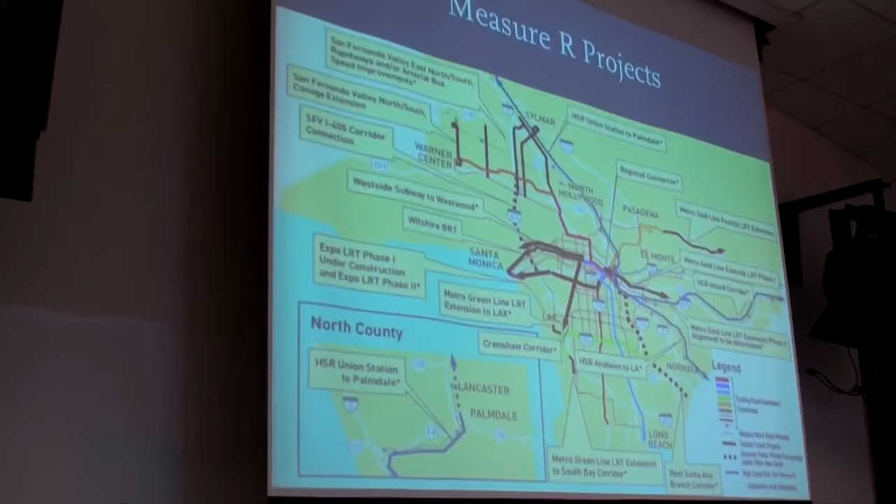Okay, so I had directions on this. Right, okay, I always like to show this picture. Those of us in this room, some of us have actually worked on these projects, this shows what we've accomplished in the last 25, 27 years. I came here a younger man in January '85, and none of that existed.

Okay, so we can really congratulate ourselves for what we've accomplished. Now, through Measure R, of course, we're going to build a lot more. I've worked with people in this room over the years on these projects, both as a Metro employee during my second tenure with Metro, and also as a consultant. Again, this is what we've accomplished, and you can see where we're going.

I knew I should have had directions on this. Okay, this is the Crenshaw Project, that's the yellow line. Now, you can see it provides a good backbone. It does connect with the Expo line, which is the brown line, and goes all the way to the green line. Now, one thing you can see about this project is you kind of want to extend it. We're making a major investment in this Crenshaw corridor, and we want to extend it.

Now, there's already a Measure R project called the South Bay Green Line Extension that could go hopefully as far as Florence. Now, we all know there's a referendum coming up in the fall, in November. Are we going to vote for it, yes? Yes, good. Well, if that passes, guess what? We have another Measure R project that's going to come forward. That's a good thing, because that means more work for all of us. And one thing we need in LA County, of course, is what? Thank you.

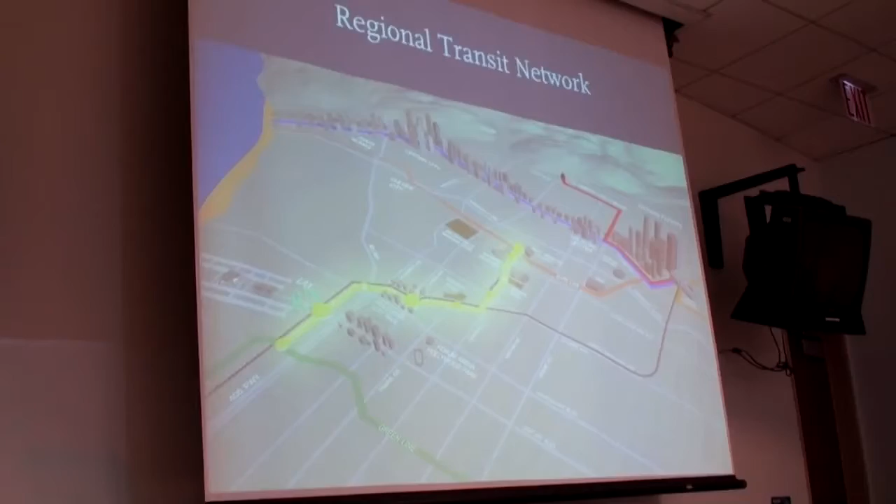So eventually this line, not only going south, but you can see it also wants to go north. It wants to connect with the purple line, and eventually go all the way—I call it the son of Measure R—all the way up to Hollywood. This line, once we extend it, it won't be me doing it, but it'll be someone else doing it, will actually rival the ridership we have on the blue line. Anybody know what the ridership on the blue line is today? Just a guess.

What was that? 30,000. Blue line? 80. How about in the mid-80s? 85,000. Okay, I tell you, when that line opened in 1990, nobody envisioned we're going to see that kind of ridership. So we've proven a point: we can actually get out of our cars and ride transit. I think that's great news.

Especially for people like me that work in this business, and others, of course, that want to help us build it.

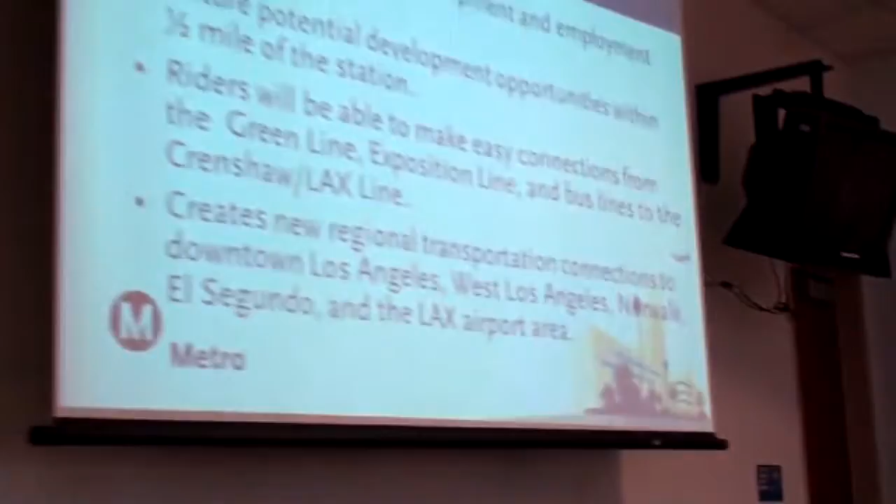Again, what are the benefits of this project? Well, it does provide economic development and employment opportunities. Again, Measure R, when it passed, our commitment is great jobs. That's exactly what we want to do.

It also provides future development opportunities, very dear to Dan here. Dan is a developer in his past life, and we want to see transit-oriented development. We have some good examples in our network today. They don't occur overnight, they take work. But all these projects, including this one, have good potential for development.

Okay, easy connections from the Green Line, Expo Line, and bus lines. It creates new regional transportation connections to downtown Los Angeles, West Los Angeles, and so forth. So again, we're connecting the county to what we've never done before.

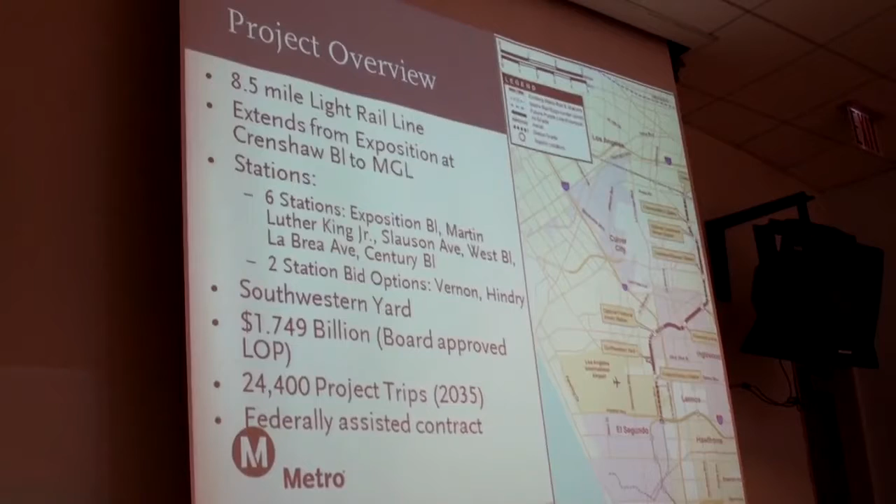Okay, this is the project at a glance. It is a light rail project, 8.5 miles. As I say, it does extend from Expo to the Metro Green Line. We have 6 stations in the base project. We have 2 optional stations, I'll talk about them more as I go on. So 6 baseline stations: Expo, MLK, Slauson, West, La Brea, Century, and of course the optional stations of Vernon and Hindry.

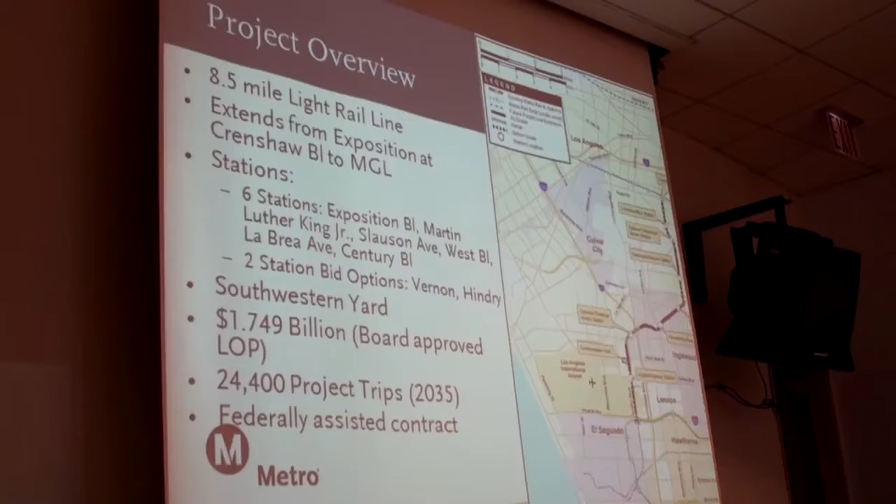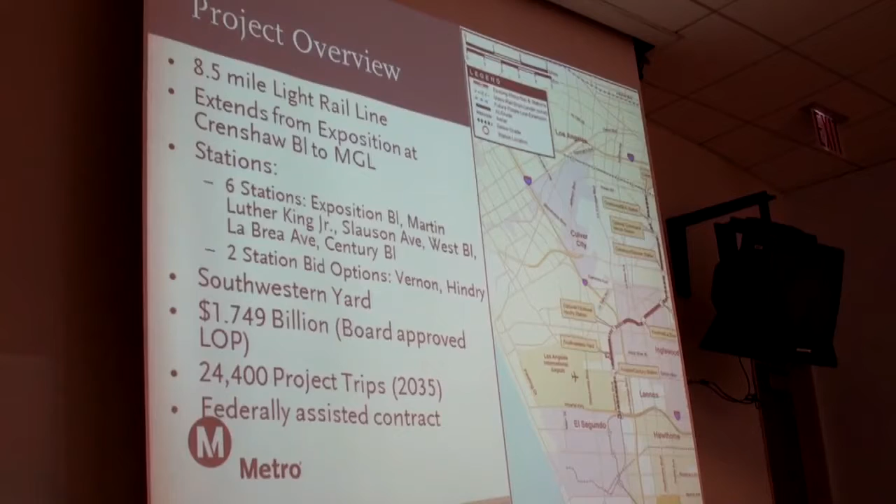We have a yard in this project. One thing we've done kind of unique to this project is rather than build one yard per line, we're now developing a yard here that won't only serve the Crenshaw line, but will serve other Measure R projects, like the South Bay for example. So we're actually now developing a yard that will serve multiple lines. These yards are very difficult, they're not easy, nobody wants them in their backyard. So it took us a while to get that yard to serve.

Again, we are a large project. We're a $1.749 billion project. Although the yard, we're actually sharing with other projects and the costs, so the true project costs are probably closer to 1.9. And I should just mention quickly, we are a federally assisted contract, so that means we have applied for a federal loan called TIFIA.

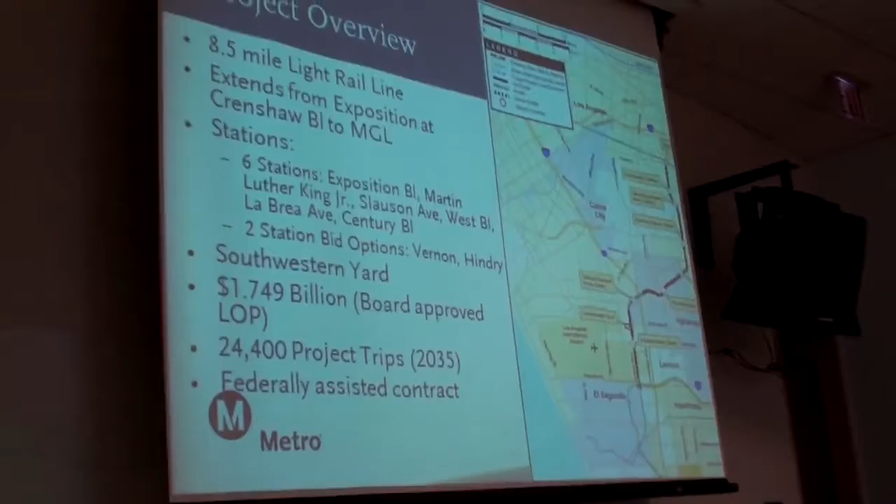Okay, I always like to show this. I've worked on a lot of light rail projects over the years. I've never worked on a project like this. This project is about 55% grade separation. Now that's astonishing, okay? And the reason it's like this is because we got good input from the community that made this a better project.

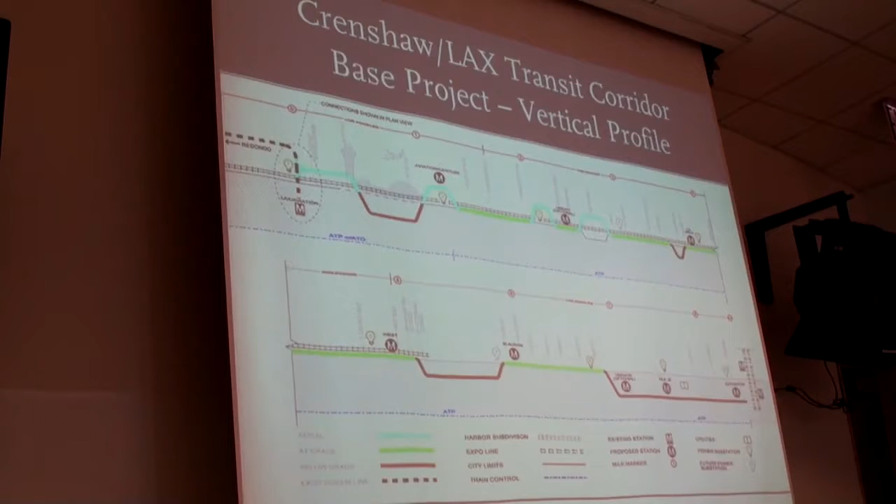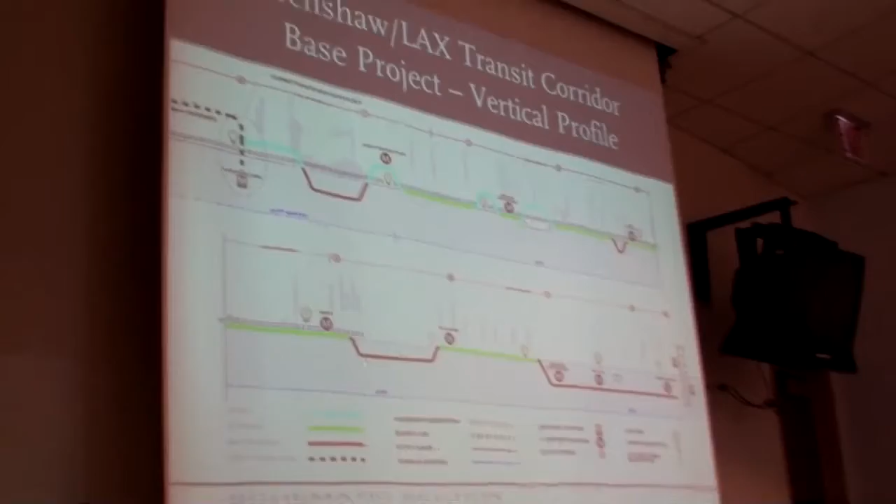This project has been in the planning for 3 decades, if not more. This project was not envisioned to be a light rail project, somebody wanted this to be a bus project. And I tell the community that we actually meet with on a fairly regular basis, because of you, because of your input, this has become a rail project, a better project today than it was intended.

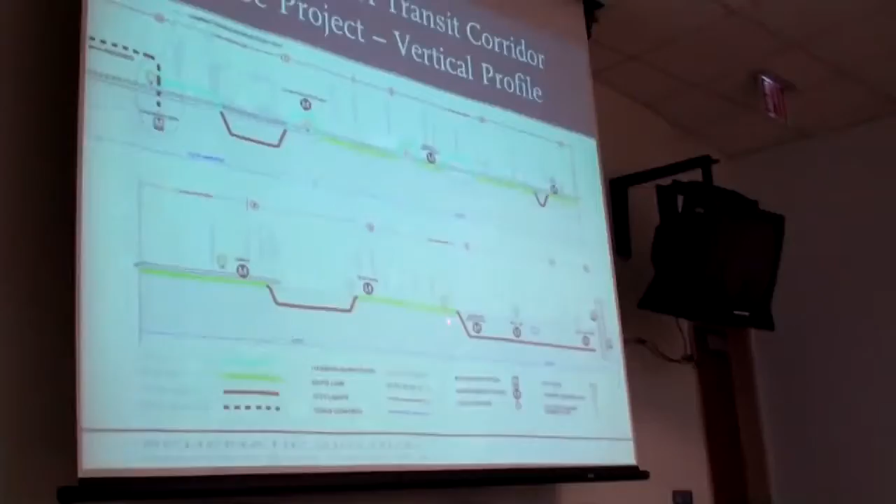So you can see, this is the Vernon station, the optional station that we are hoping to build. We also have the optional station in Westchester. But you can see here, we have a lot of grade separation. Now I'm going to go through some slides that kind of run you through the alignment.

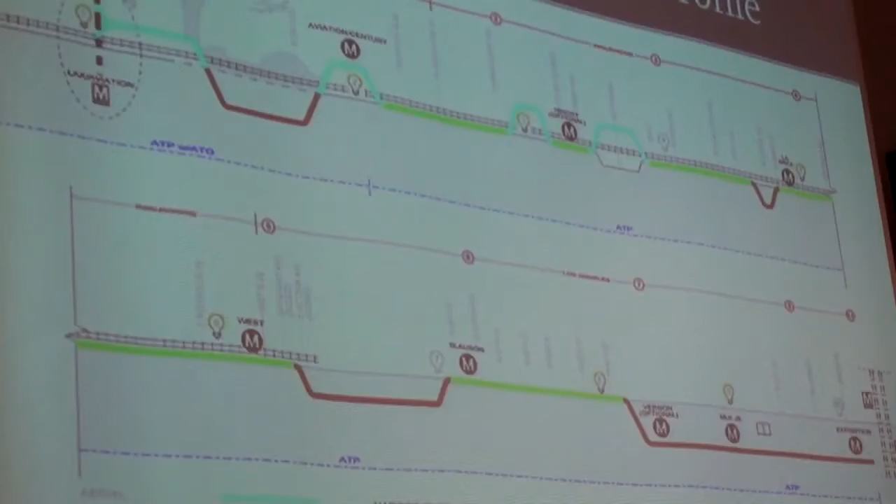Okay, so the project starts with connection to the Green Line.

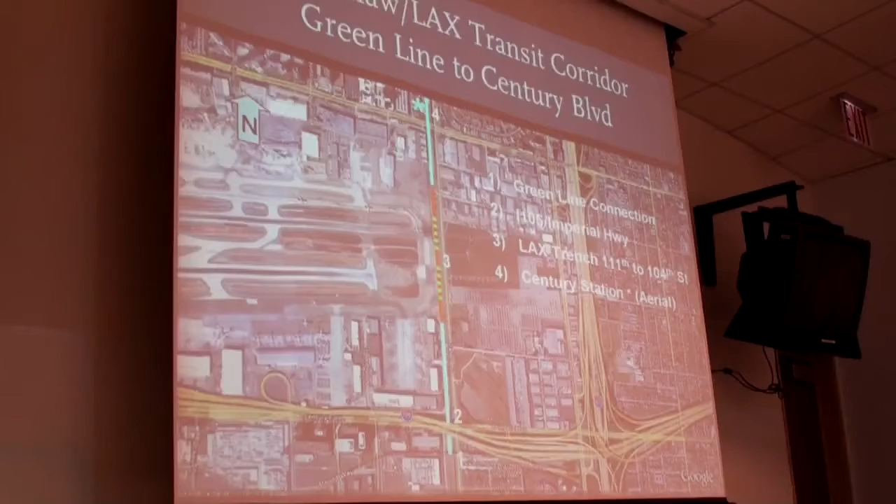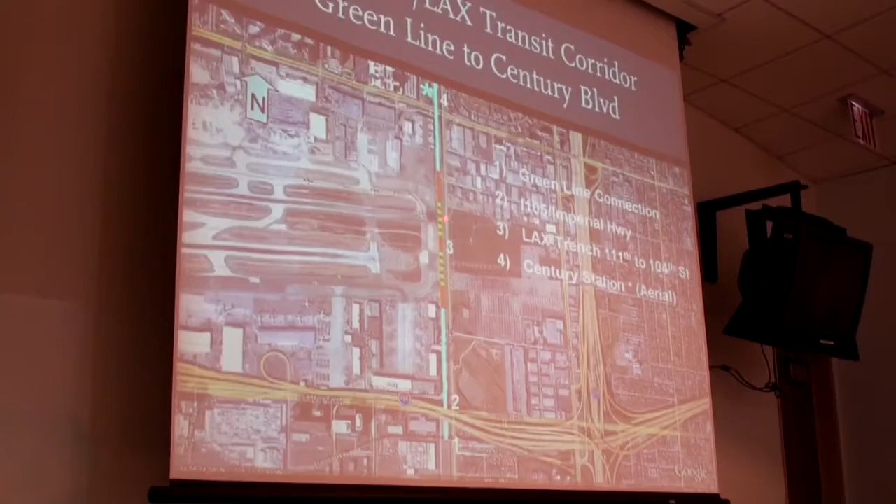The blue here is aerial. So we come off the Metro Green Line and fly over Imperial. We cross over 111, then come immediately down to grade. I'm sure you recognize the south runways here for LAX. We come down the grade and immediately go into a covered trench, we'll call it. Then we go right back up onto an aerial structure, crossing over Century, where we have the station at Century Boulevard.

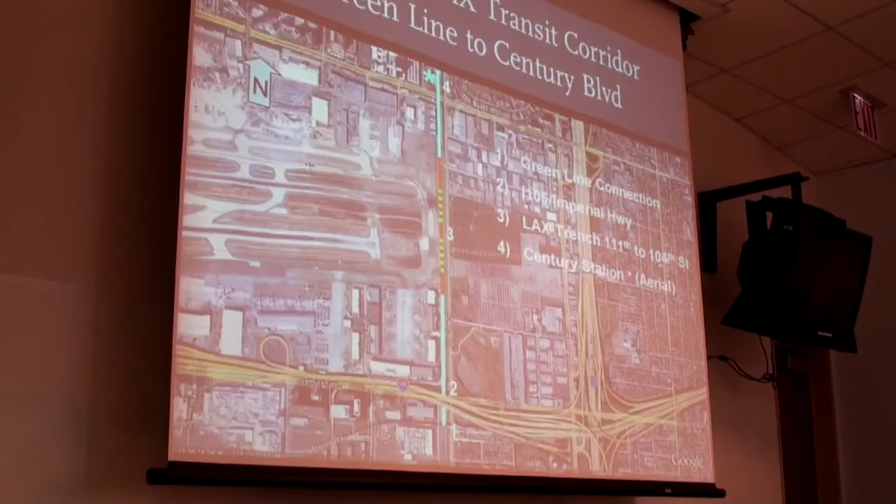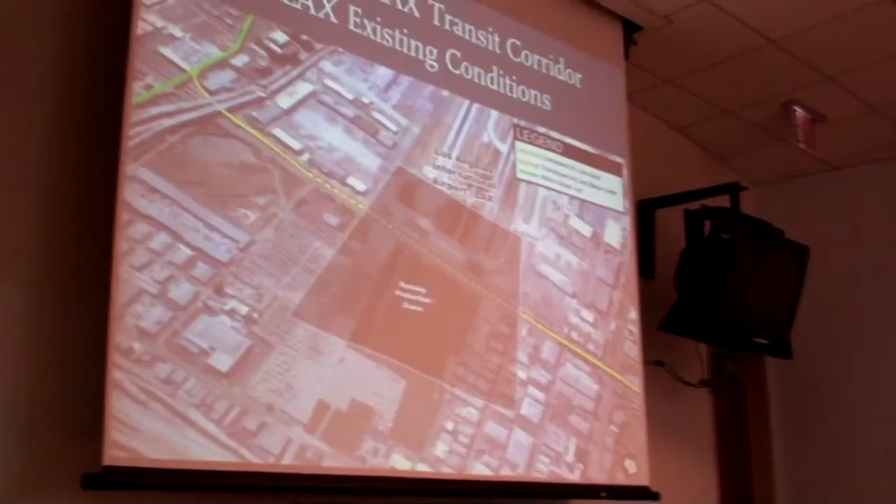This was a challenge, this area was a real challenge. Back in 1990, a project called the Metro Green Line was supposed to build this, supposed to build the Green Line all the way to Lot C, which would have gotten us pretty close to the airport.

We are seeking innovation from the teams moving forward. We'll talk more about this in our pre-proposal meeting, but we want innovation from the teams moving forward with us, and of course we want the prices. But FAA is quite difficult to deal with. We were able to at least get a covered trench, which saved us very much money. They wanted us to be in a fully covered tunnel, all the bells and whistles, so they couldn't go at grade. Dan was pushing me real hard, but this is probably the best we could get.

FAA, at the very end of the environmental phase, became what we call a cooperating agency. That means they have to sign off on the document before we can circulate it. FTA, the Federal Transit Administration, will not overrule the FAA, they simply defer to them. So we have to have two federal agencies, FTA and FAA, sign off on our document so we can circulate. We achieved that in a fairly short time. Supervisor Mark Ridley-Thomas was very helpful in that regard, opening doors for us with FAA in DC. I still have regular dialogue with the folks there, and continue to use them to work those issues out with FAA.

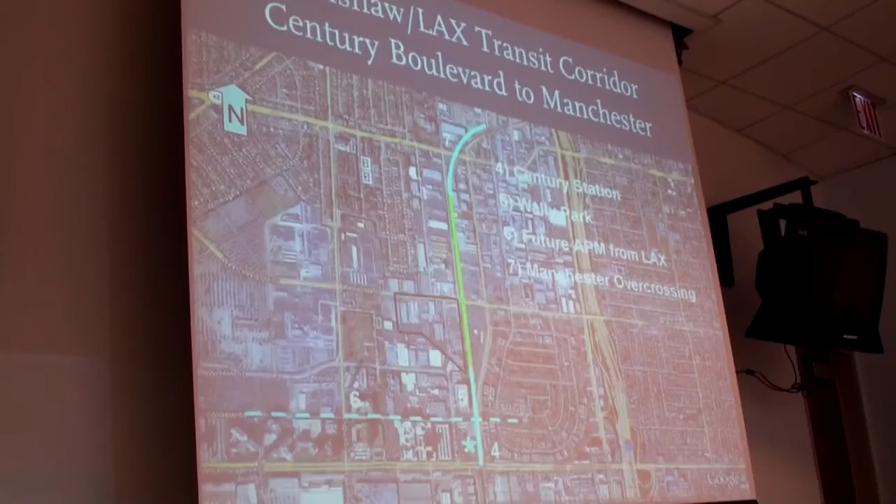Continuing, number 4 is the station. That little blue dashed line there is what I was calling the Airport Metro Connector. There are many different ways to do that, that's just one, it actually represents the future people mover. There's no guarantee it'll be a people mover, but this shows how that Century Aviation Station could someday become a major intermodal station, to reduce congestion around the airport and help commuters get there without their cars.

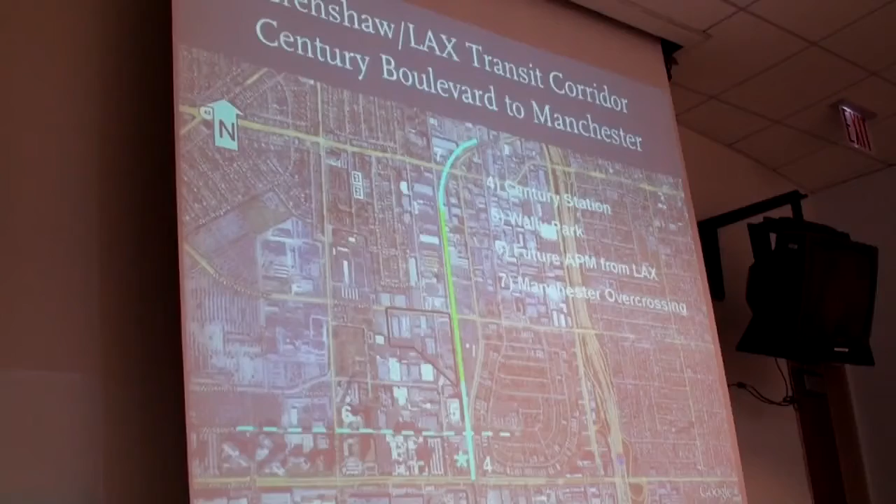So as we leave the Century Station, we do sneak by Wally Park, already having talked about the future people mover. Then we come back down to grade, which is the green. We immediately jump over Manchester, a major street. We cannot run at grade there, so we are grade separated over it.

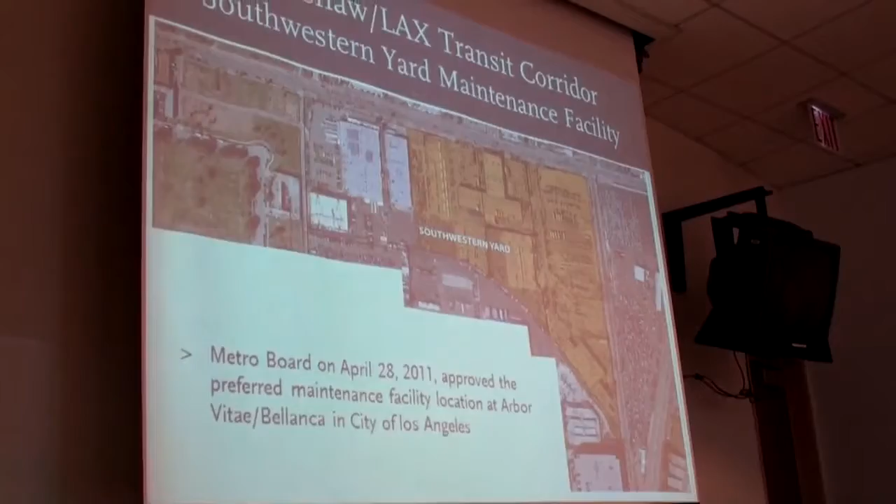This is our yard. If we go back a bit, you'll see where the yard is right here. We went through about 23 different sites before we went back to the board and finally selected this site. This is about an 18-acre site, it will hold about 70 cars, and it will serve not just this project but several projects in the Measure R pipeline. That's kind of what it looks like.

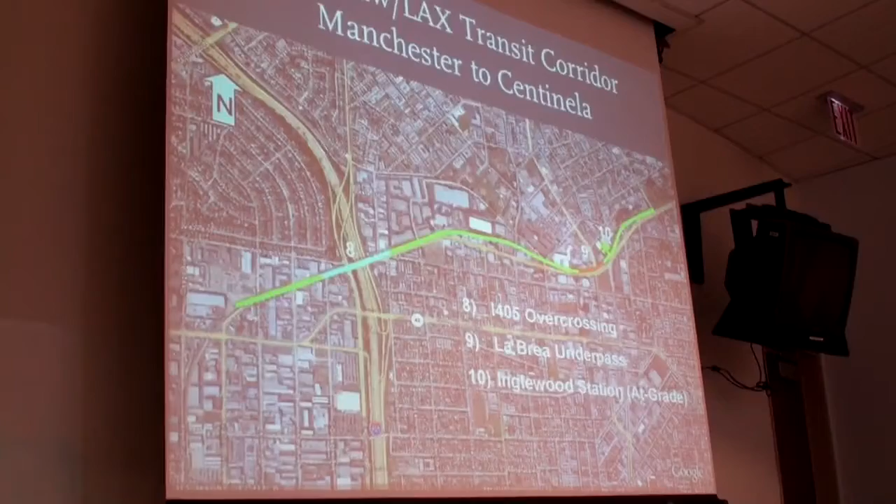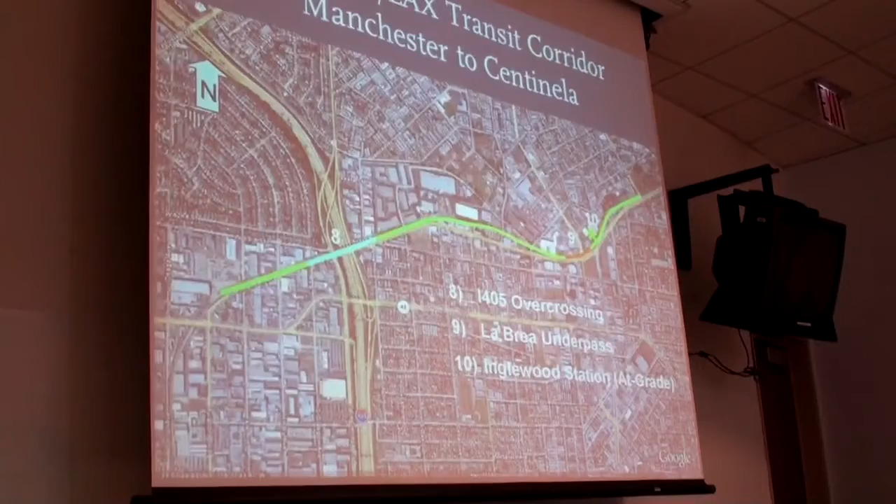So as we continue at grade, it's a very short distance. We then jump over La Cienega and the 405 freeway. La Cienega is actually part of an off-ramp off the 405 freeway, so we could not run at grade there. So we jump across the 405 freeway, go back at grade again, and we get to La Brea.

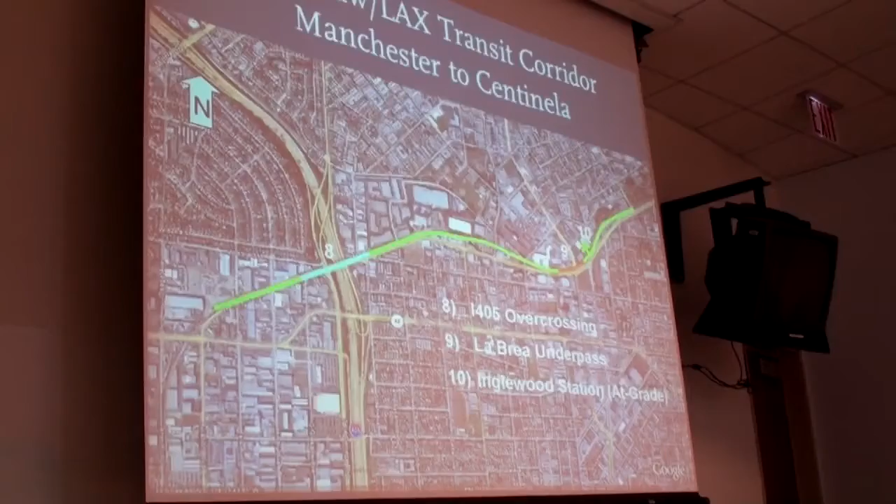We go under La Brea and have a station just on the east side. We originally wanted that station to be actually at La Brea, but there's an Inglewood fault there, and we did verify that the fault traces are active. So we had to move the station further away from La Brea. Now it fronts Inglewood's commercial district, right between Locust and Market.

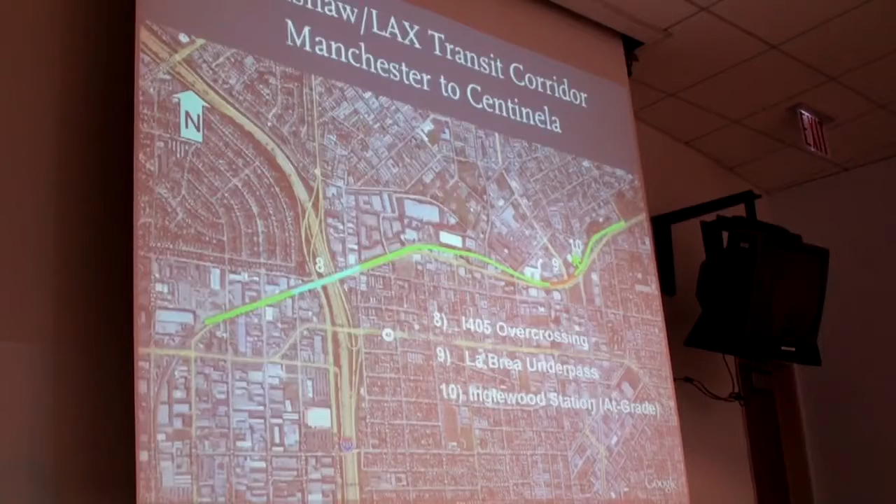Not an ATC, guys. Sorry, by the way, I'm using this word - for those who don't know, ATC stands for Alternative Technical Concept. We are looking for innovation from the teams to get a competitive edge, provide value, or so forth.

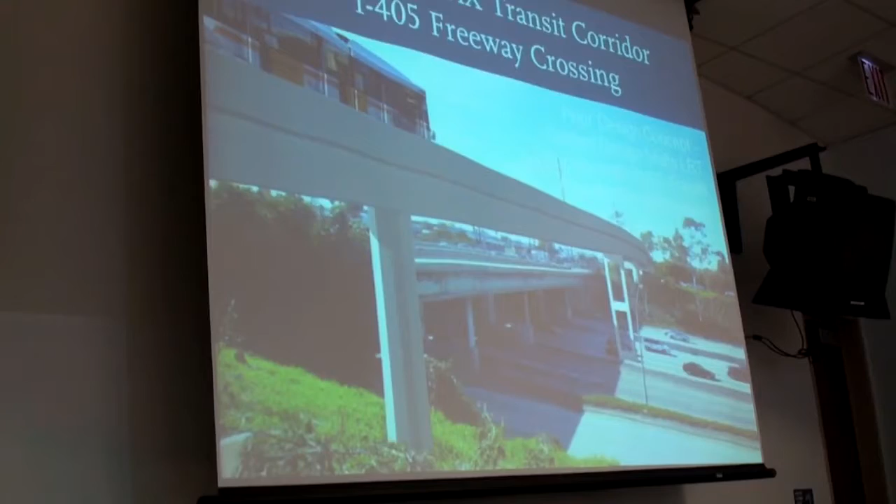But think of it this way - if you were to run across that bridge today with a freight train that runs every 2 hours maybe, compared to a light rail system that's going to run every few minutes, it's different. So if we want to go back up across La Cienega, remember the La Cienega ramp runs off the 405 freeway, it's very difficult to run at grade across La Cienega.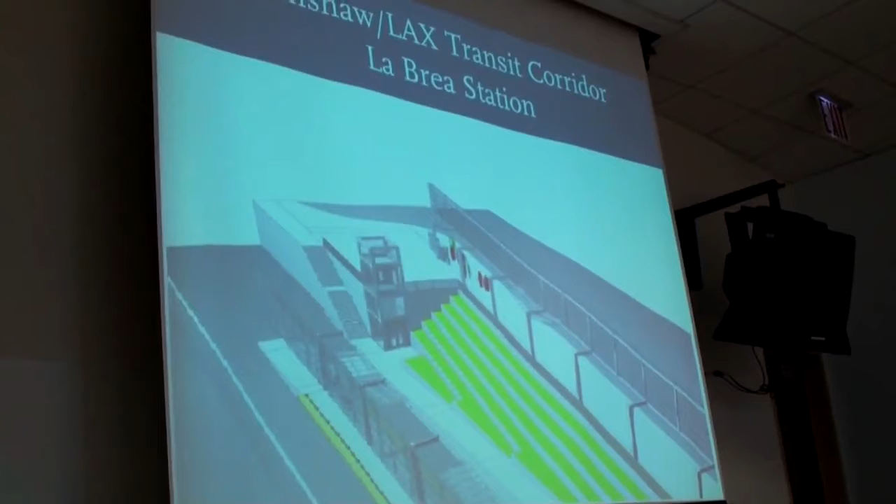Okay, this is the La Brea station. It's not the best picture I could find, Maris - in fact, I should have called you, you could have sent me a better one. But again, we did move the station further away from La Brea.

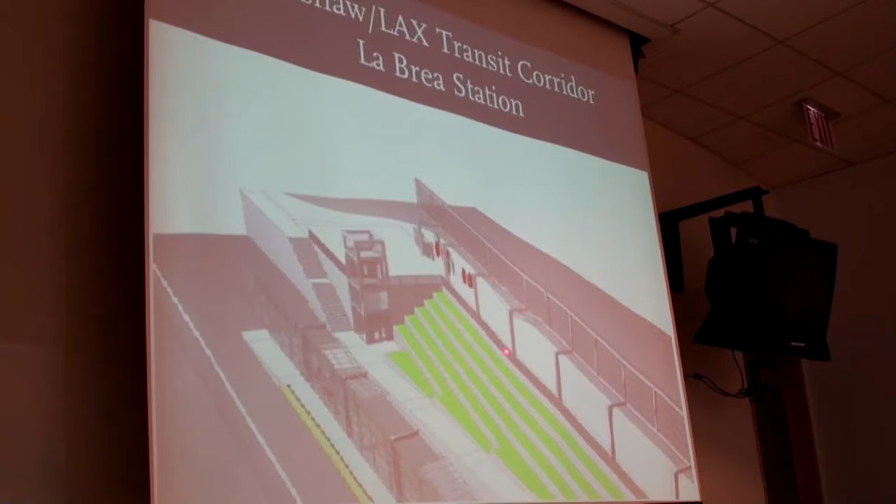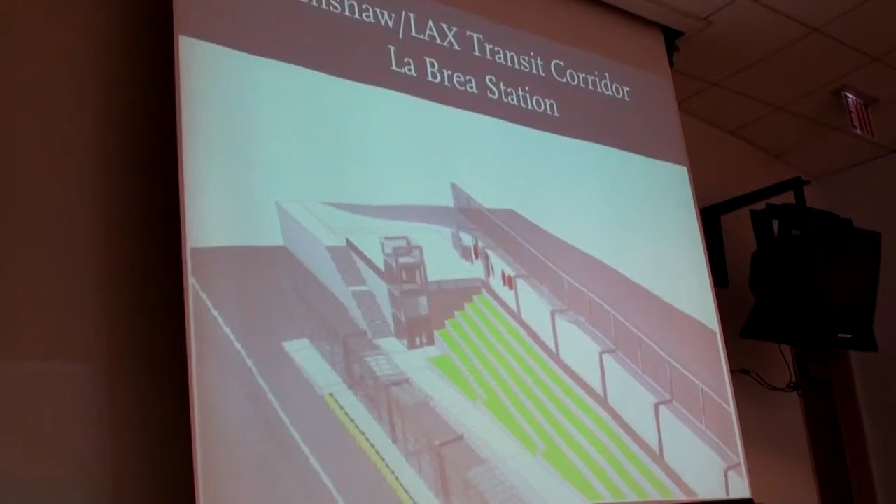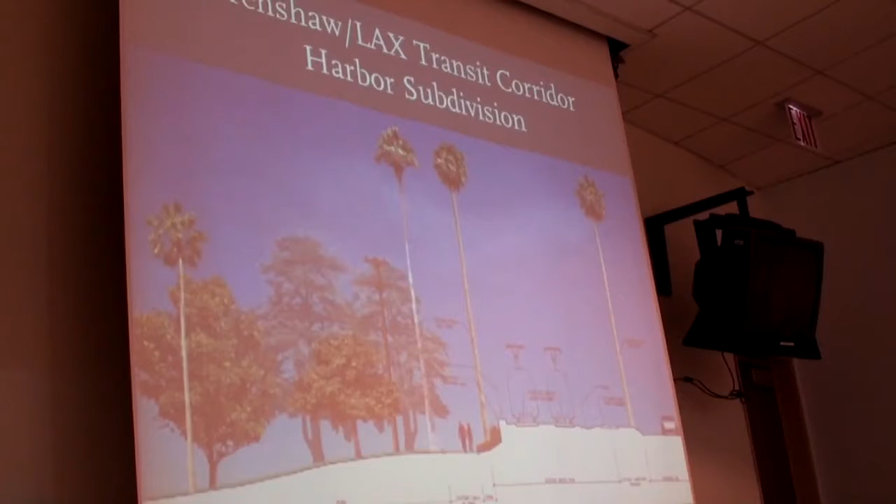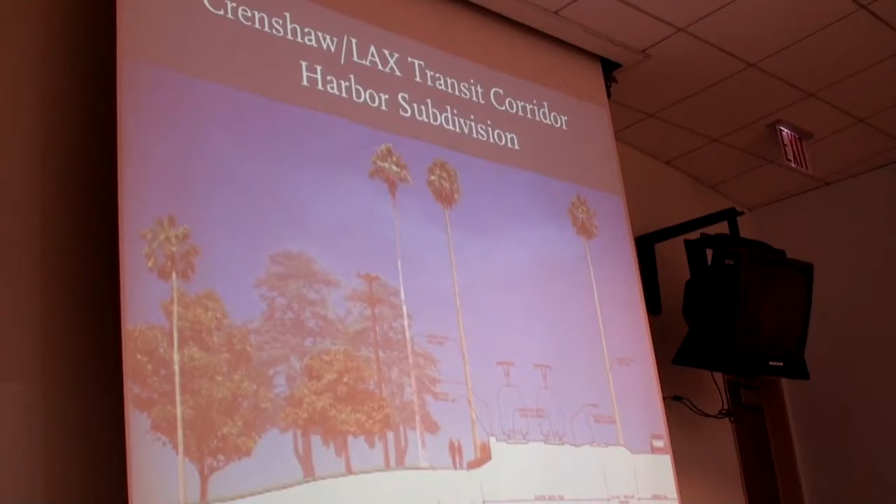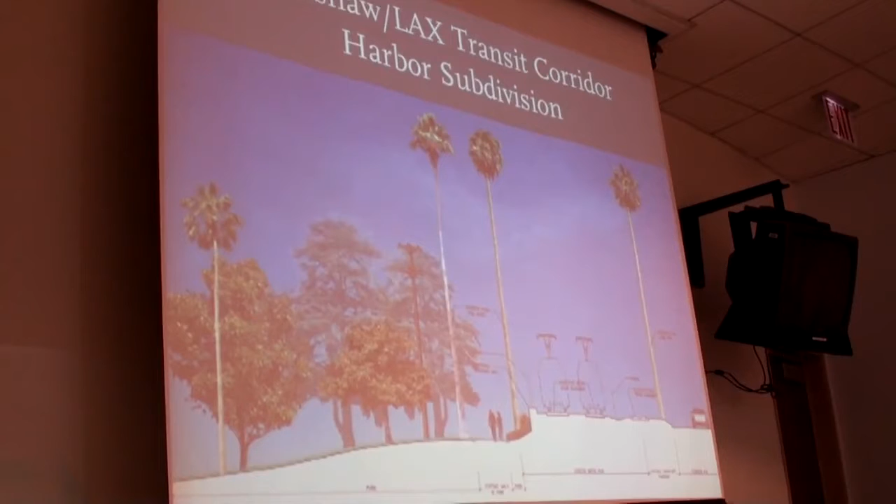Okay, this is the typical section along the Harbor subdivision. Actually, this is near Edward Vincent Park - there are a lot of palm trees. We used to have a cover sheet for this project with a lot of palm trees on it, but we changed the cover because we're in a new phase. We've committed to maintaining as many of the little palm trees as possible. That's a very typical section for us in the Harbor subdivision. Remember, the Harbor subdivision is based on an old railroad corridor, and for the most part we're running at grade through that corridor.

Okay, so we're continuing at grade. The next station is West Boulevard, the second station in the city of Inglewood. We are putting parking at several of these stations: La Brea, West, and Exposition. Now, that's kind of an interim use.

Again, I talked about development earlier in my presentation. If there's a better use for those sites, and I'm sure there will be someday, that parking could be very short-lived. Metro's not really big anymore in providing parking. We provide it where we have to. We're much more interested in good development proposals.

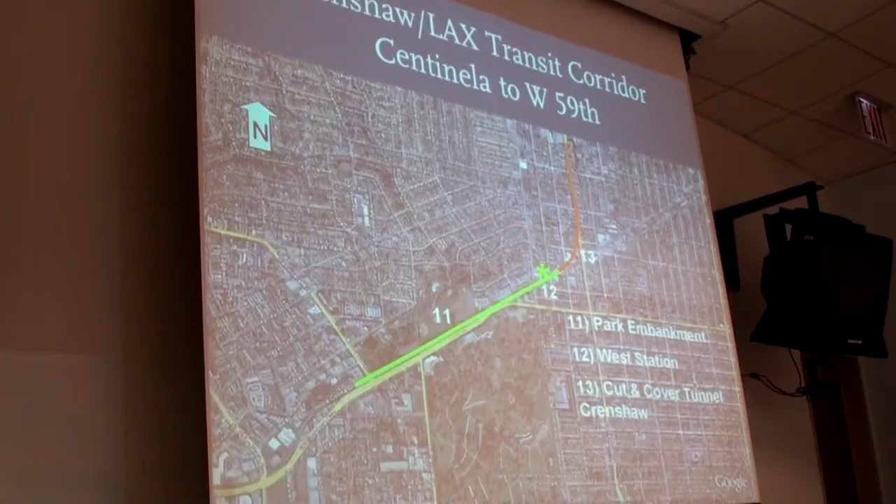If people are gonna ride the trains, don't they need places to park their cars?

We're encouraging you to be a commuter. I mean, this station at West could actually become like a neighborhood station. You can walk to it, you can drop off to it. There is some parking we're planning here in the interim period. Eventually, I think we'll find a better use for it. Again, Metro is trying to get you folks in this room to become commuters, to enjoy taking transit.

When you're running late, you want to run past some of the stations. But again, you get back on that freeway, you're gonna get late anyway.

You said that the station is in Inglewood. If it is west of West Boulevard, it is in LA. If it is east of West Boulevard, it is in Inglewood. Yeah, actually, West Boulevard itself is the boundary. The station itself is in Inglewood. Remember, West Boulevard is the boundary between Inglewood and LA, but this station actually is in the city of Inglewood.

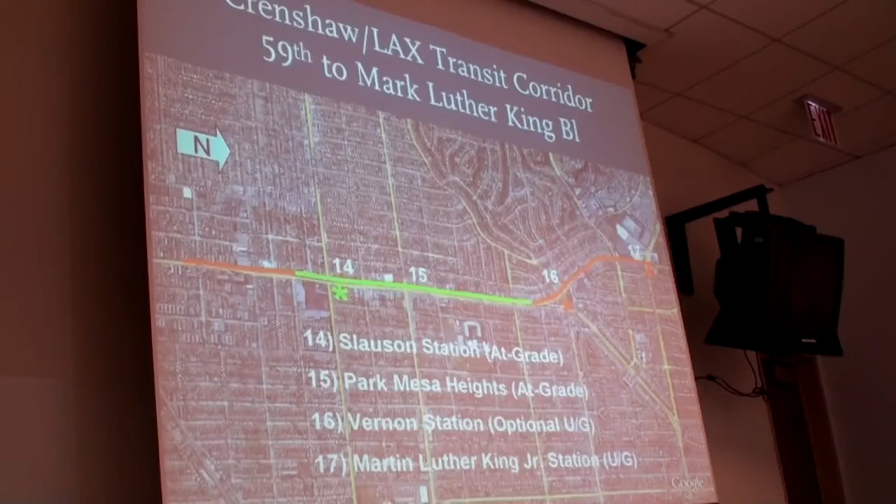Metro did get a lawsuit filed against Metro. We're going through the process, and we're just going to work through it. Slauson Station there - again, there is a station at Slauson in the at-grade section.

And you can see we're at grade between 48th and 59th Street on Crenshaw Boulevard. You can see again where the red is on 48th Street - we go back into a tunnel again.

In this case, we expect this to be a real tunnel, or some cut and cover at the end where the approach is. By real tunnel, I mean we're expecting you guys to propose a tunnel boring scheme.

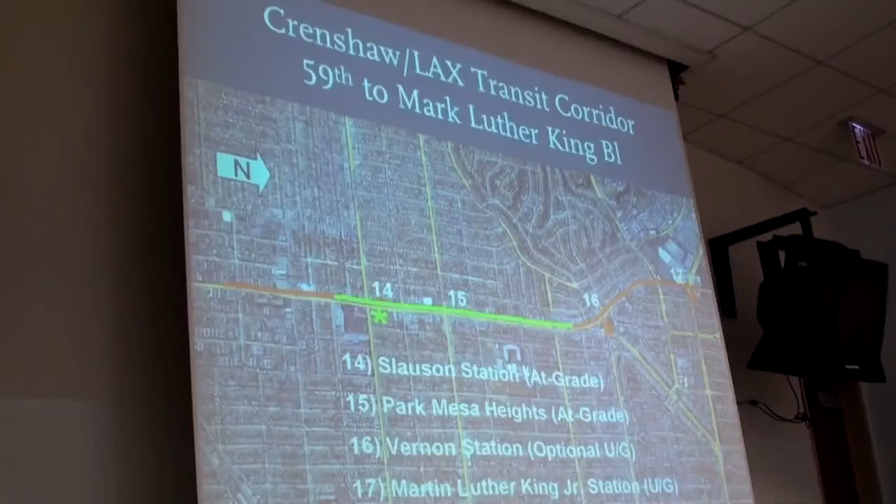Interesting to note, we cleared this project environmentally, fully cut and covered - you guys probably didn't know that. This project actually is similar to the East Side Project, only it's a bigger project. The East Side Project is one of Metro's most successful projects: on time, on budget, no claims, and saved a lot of money. So it's a project we are trying to model this one after.

How long is the tunnel, if I may ask? It's about a mile and a half. Again, it's very similar in length to the East Side Project.

Is the optional Vernon station on street or off street? I'm getting there, I'm getting there - that's why I put that to the end of the presentation.

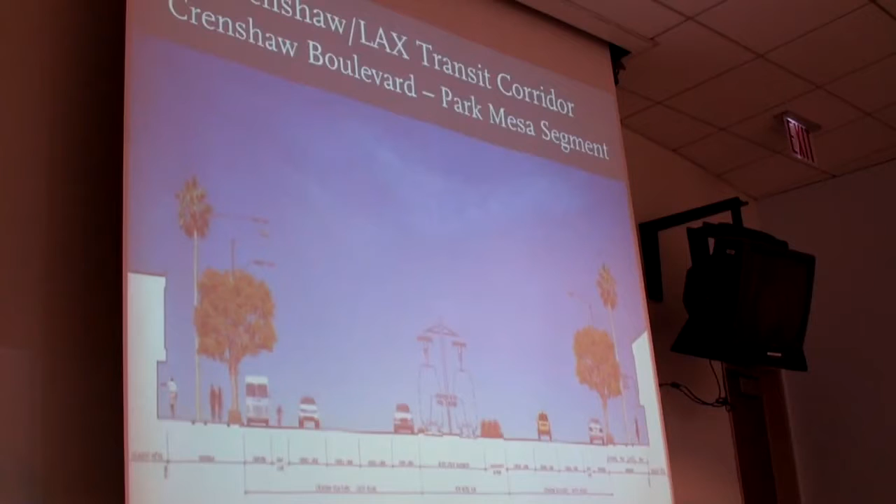This is the at-grade portion to Park Mesa. Now, this is the widest portion of Crenshaw Boulevard, so it lends itself to running at grade. There's a median in the center of that boulevard - we're taking the median out. There's also a frontage road on either side of this portion of Crenshaw Boulevard. Our concept here was to turn Crenshaw into like a wider Grand Boulevard, with wider sidewalks, landscaping, and so forth. But again, this is the widest portion of Crenshaw Boulevard. It does lend itself to being an at-grade light rail system.

Yeah, it's actually a little more than that. So again, it is a wide street - there's 3 lanes in each direction. When we're finished with it, again, it's a very wide street.

Did I hear you correctly that the frontage streets - today they are frontage road - will be taken out, and it'll be just a wide boulevard? What we're doing though is we're providing much wider sidewalks so that we have space, plus we're putting up landscaping.

Okay, this is just a snapshot of the Slauson Station. Again, we're in the center of a pretty wide street. Actually, a lot of traffic runs up and down the street.

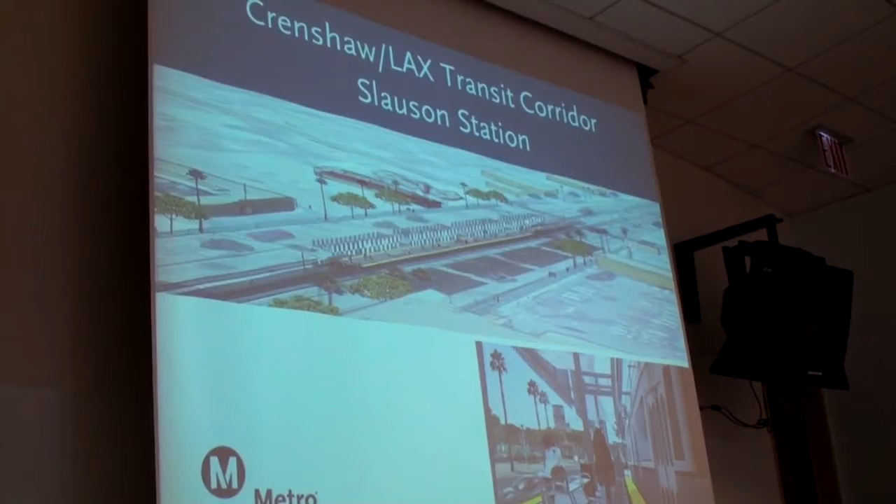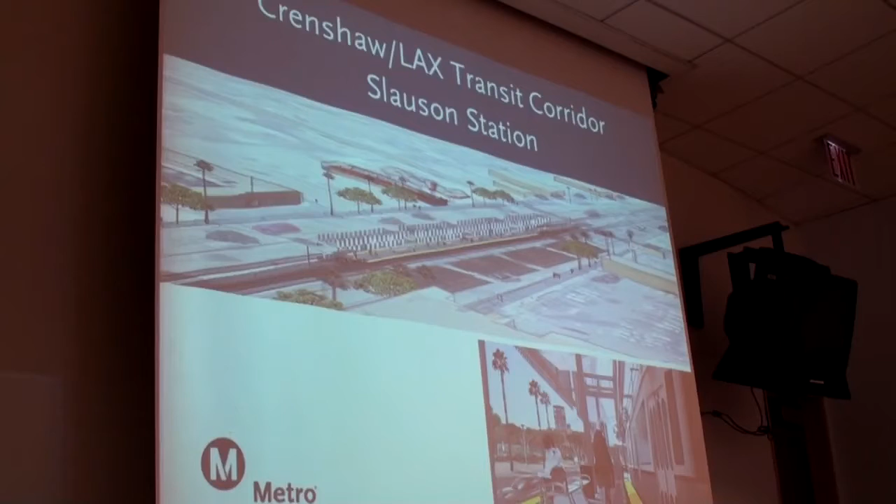Probably one of the highest ADTs on any street in LA County. So the challenge for the architectural team was to find a way to make us who are going to ride this feel comfortable. So this concept was to try and create some mass so you feel safe and secure while you're waiting for that train in the middle of Crenshaw Boulevard.

So this is the concept. We'll see where it goes during the procurement phase. But I do applaud the architectural team for a difficult challenge, and this is how they chose to overcome it.

Did the average daily traffic... So I think Crenshaw Boulevard is 40 or 50,000 vehicles per day, which is a very, very high number. Yeah, very, very high number.

Okay, this is the MLK station. That's the Walmart building you see there. Now, in the environmental process, we actually had an entrance on the east side of the street, not the west side. It's probably no surprise that the mall approached Metro and said, what can we do to have you guys consider putting your entrance on our side of the street? So it makes most sense.

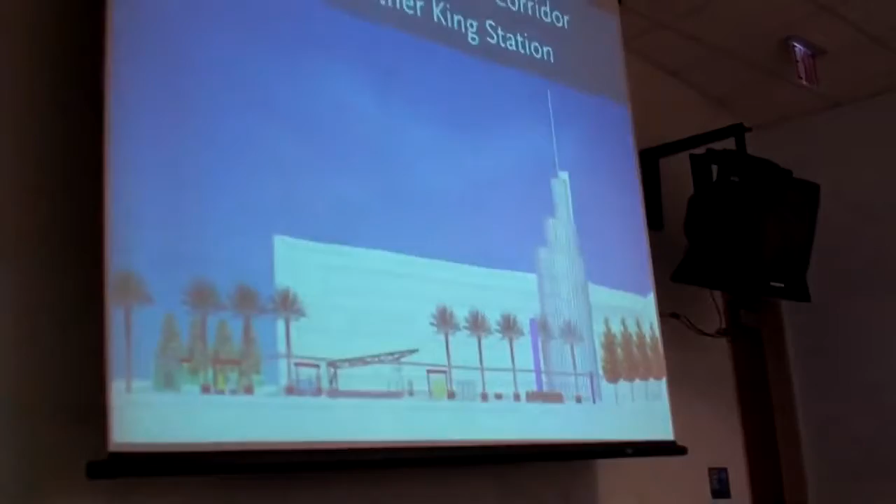So this is the concept, a fairly simple canopy, some lush landscaping, and all this has to blend in with the Walmart building, which is actually a historic building. We have to go through the State Historic Preservation Office to make sure our designs do not take away from that historic fabric of our building.

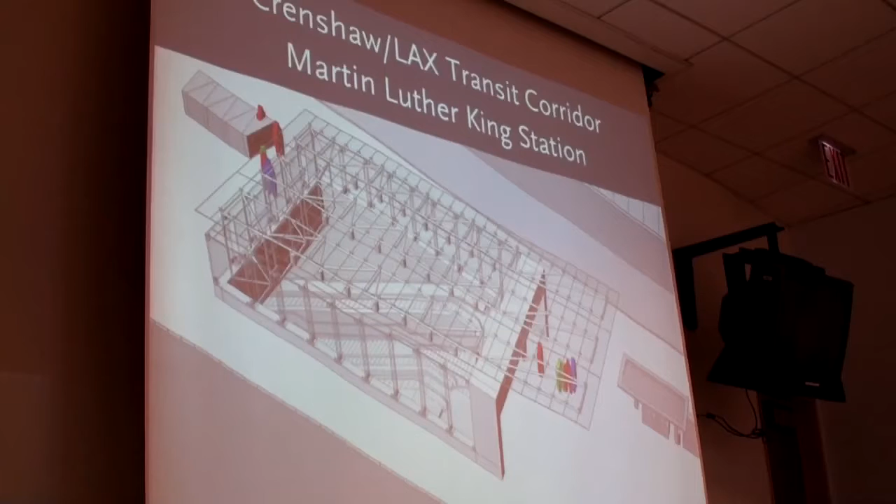This is just a snapshot again of the entrance. We like to use a lot of glass to keep the station open and visible. It shows you the portal going down into the station below.

See, Jim, I told you I took some slides from you.

This concept was again to add lush landscaping. For those who have actually been to the mall, there's a fair amount of landscaping already there, but there's no entrance on the Walmart store on Crenshaw Boulevard. It's on the ends. So one of my first meetings with Ken Lombard over at the mall, we said, we can do this entrance for you.

And guess what? You have a wonderful opportunity to take those two emergency doors, which exit onto a narrow sidewalk on Crenshaw, and turn them into a main entrance. So I'm waiting to see, as we build this project, if they take us up on that and actually do it. I think they will.

For those of us who have bad eyesight, point to where the station is in the street. Actually, there's a slide coming up that I'll show you, but I'll show you the outline. Let me go back to the ones that were out of order here.

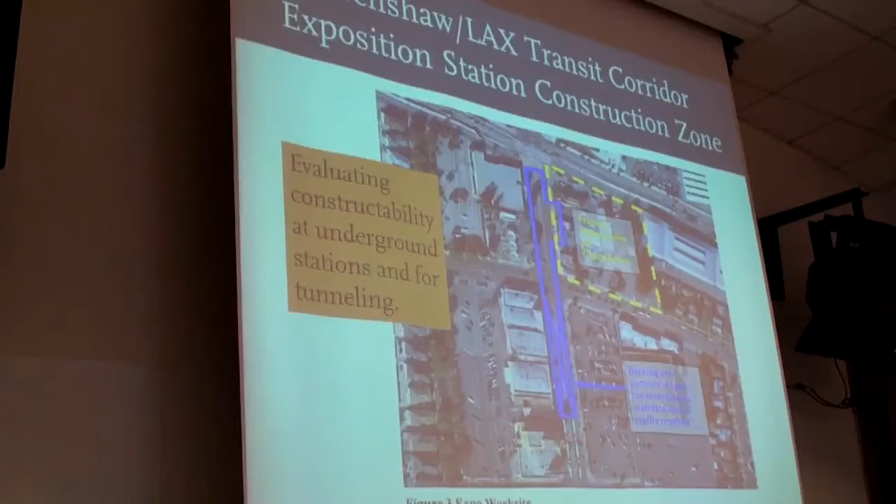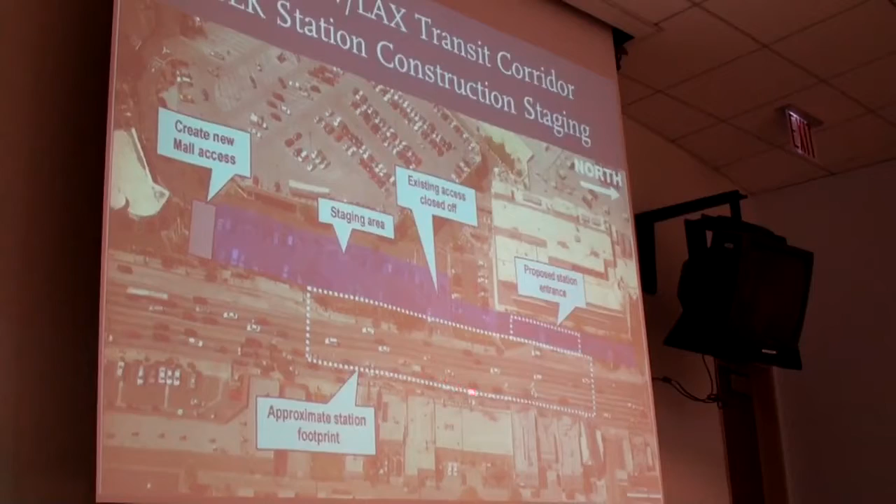Okay, this is again the MLK area. That dashed line is the station box. Now these boxes are quite large, about 400 feet long and about 50 or 60 feet deep, and you can see it takes up the whole width of Crenshaw Boulevard.

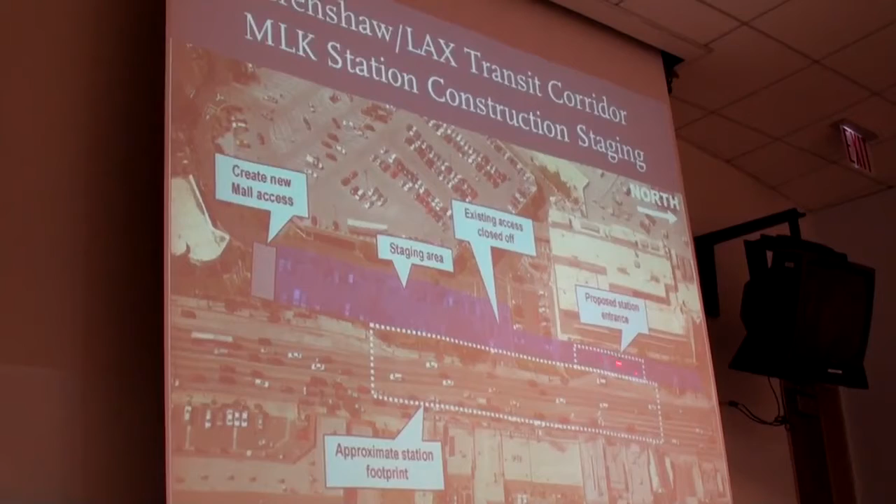The entrance is right here, the glass portal I showed you earlier. So when we sat down with Capri, we said, okay, we're not going to preclude an entrance on this side, so we're going to put what's called a knockout panel to allow a future entrance should this area be developed while this project is in operation.

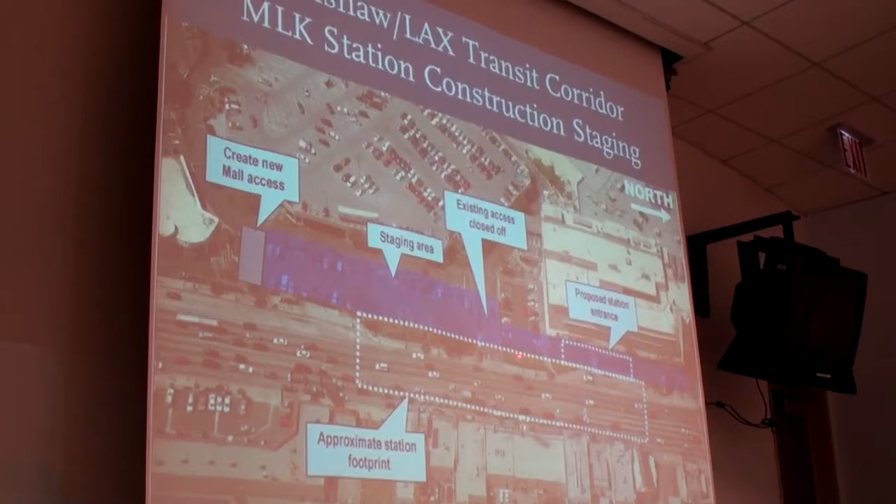So we asked Capri to give us the easement, which they're willing to do. Now, for the contractors in the room, they also agreed to let us use that parking lot for laydown. So we're going to have use of this whole area you see in blue here for about 4 years to build this.

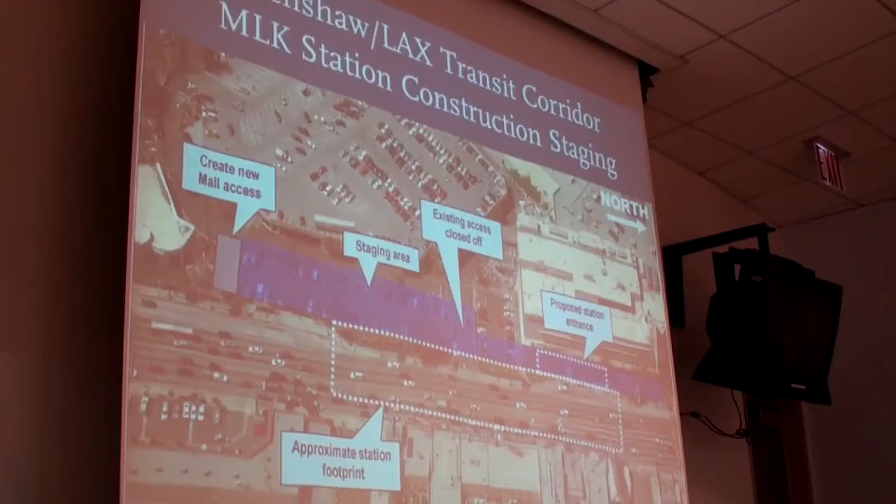So again, these are not simple. They do take a few years to build, and there are some challenges. So this is the area that we were able to negotiate for the contractors to build this station.

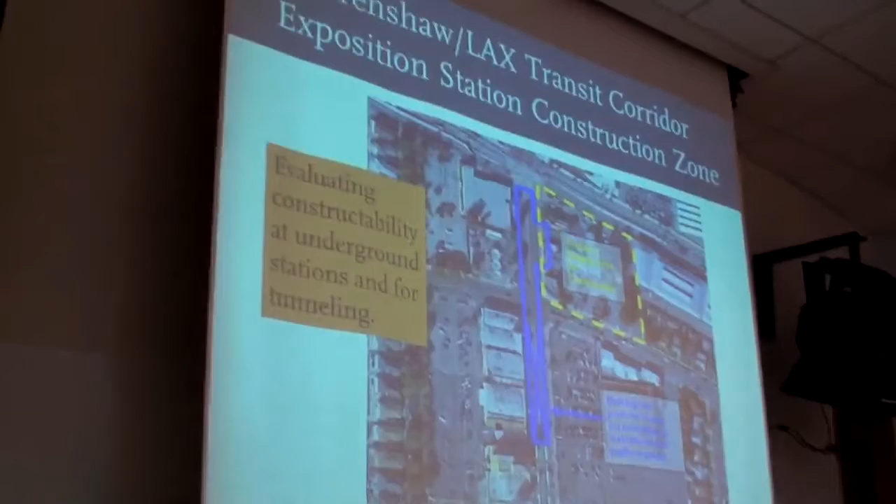I'm going to come back to that one. Well, actually, let me go right there. This is the exposition station.

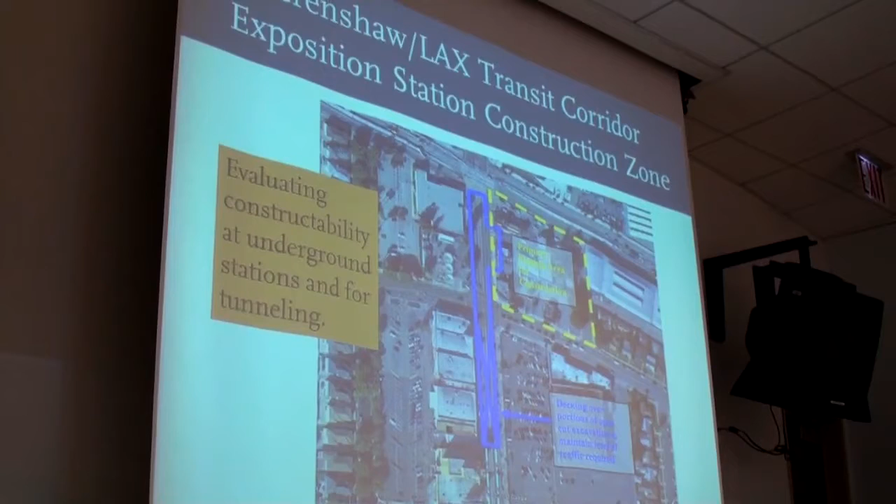Again, the canopy I showed you earlier, the glass, open style canopy, is what we'd actually envisioned putting here. Now you can see the whole block here. This is actually the expo line here. This is Crenshaw. This is Rodeo. So we're planning to take the entire block here.

Again, this is the station itself. There's a crossover on the front. All this is underground. This is about 800 feet. We're proposing to use this site for mucking.

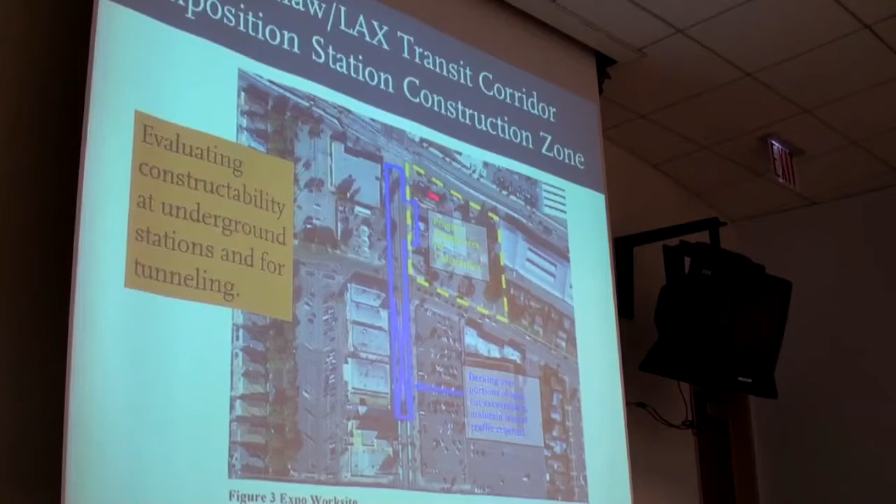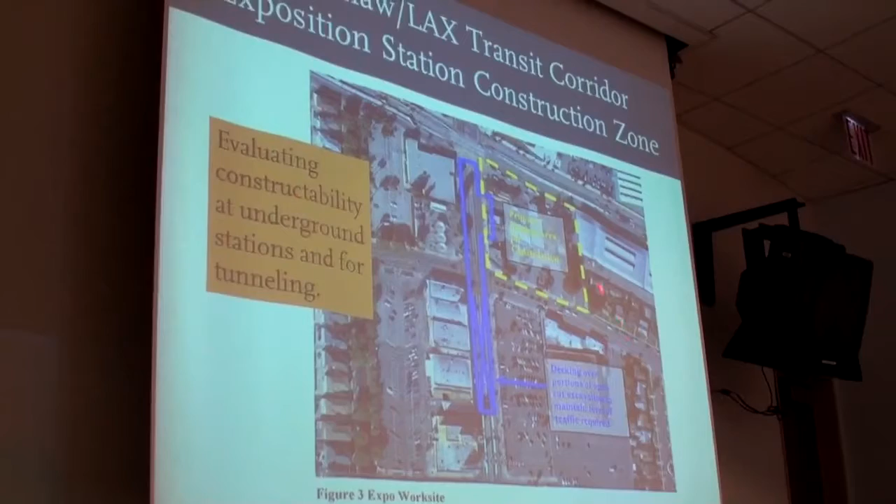This is where the muck, the tailings will come, and we'll take it down - the contractor will take it down - perhaps to the 10 freeway. Again, this is another laydown area we're providing, and this is going to be a parking lot when we're done.

Again, interim use. I expect they will find another use for this very quickly, perhaps quicker than we actually think.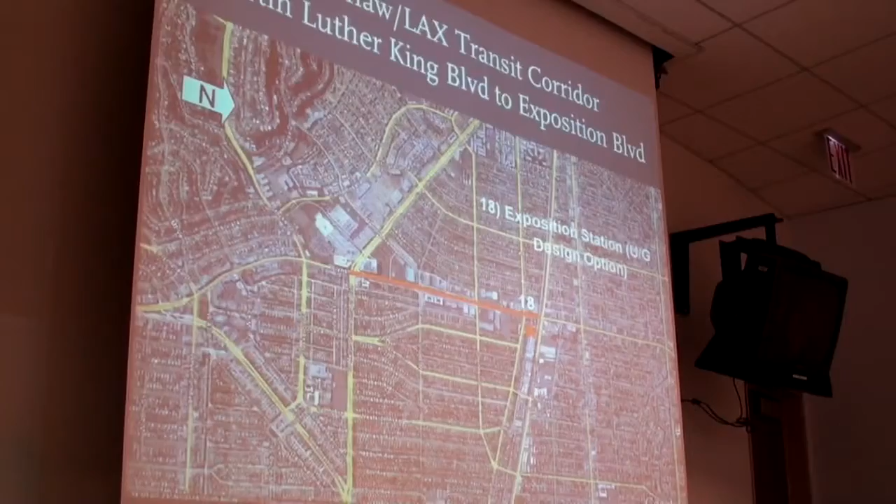This end of the project was envisioned to be at grade. Through a lot of discussion, a lot of teeth pulling, we finally convinced people that this had to be underground. Now, we had a gap in this project, as Dan and others well know, that we've been working to mitigate for a long time. So we've been scrubbing this project so we could actually afford to build that underground section all the way to Expo. We had problems with the PUC when we were looking at that grade. The city didn't like it either.

So I think this turned out to be a much better project. Again, it's input from the local agencies, input from the community, and we decided to go underground all the way to Expo. Now, you remember one of the first slides I showed you, that future extension all the way up to Hollywood? This allows us to do that.

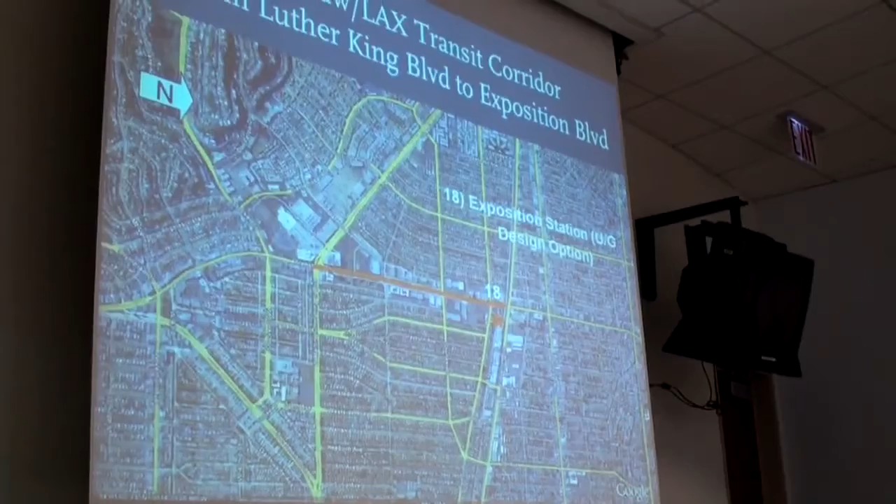If we're at grade, it'll be rather difficult. Because we are actually below grade, we can actually someday in the future extend this project all the way up to the purple line, perhaps beyond.

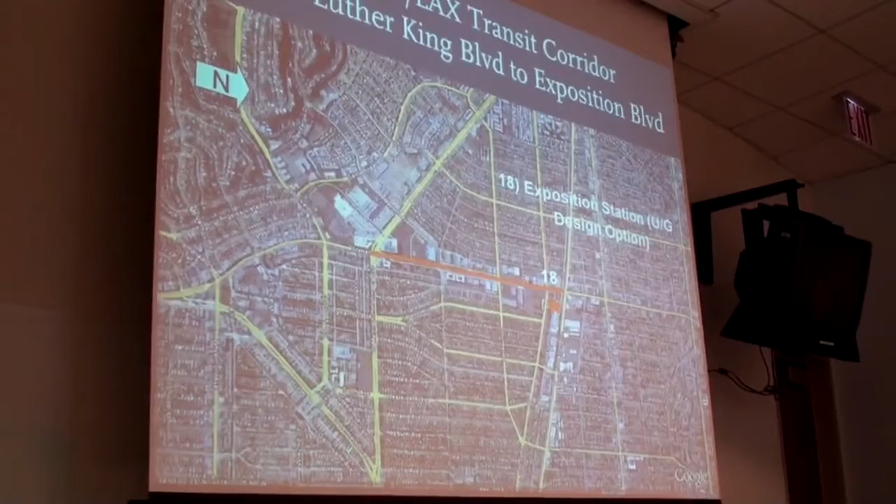So would you bury the TBM and keep it there for the future, or take it out? We'll see, we'll see. I mean, future could be a ways away, a few years, could be sooner. Remember, Measure R right now does not recognize a project north of Exposition. But there is a good project wanting to happen, to extend this line, and it significantly improves the ridership. Like I said, we begin to rival the blue line in terms of ridership when we extend this line.

Okay, milestones. Again, the board approved the environmental document back in September. We got what's called a life of project budget in October last year. We got our record decision from FTA back in December. Our first construction contract, which is our advanced utility contract, we got bids on April the 18th. We've awarded the contract to Metro Builders. We're looking to give them NTP hopefully next week. We had a groundbreaking on June 4th at the mall.

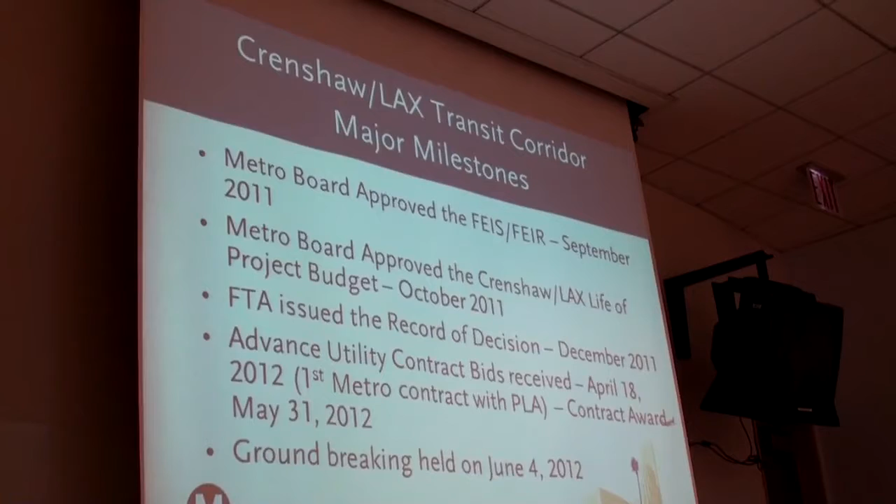And this again is our first contract with a PLA. Everybody knows what it means, right? PLA, Project Labor Agreement. If you have questions, this lady right here can answer them for you. So again, Metro did create history, in fact, by adopting a project labor agreement and a careers policy for all our projects. I believe the threshold is like $2.5 million. So again, all our major projects, including this big one, will have a PLA in it, and I'll explain what that means in a few more slides.

For the main design build contract that I'm talking about, we have set goals already for design and construction. The goal is 20% each for design, and there are separate goals for construction. Now, the project labor agreement, we do have a goal of 40%, and that's to encourage our contractors to find workers in what we call economically disadvantaged communities. Not local hire, okay, because we have federal dollars in this project. But economically disadvantaged communities, the goal is 40%.

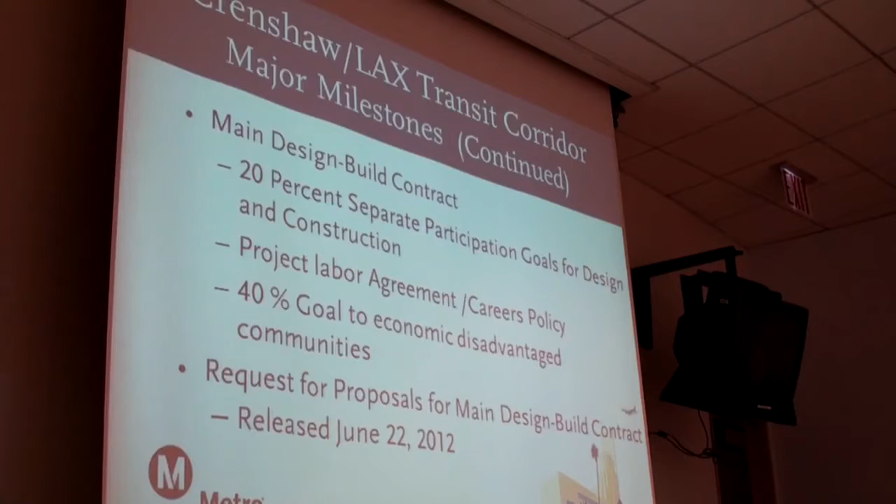Okay, then we did release the RFP to the pre-qualified proposers on Friday. And they all picked it up by now. They did. Okay, so again, 4 of the 5 teams have been pre-qualified. They're listed there. I don't think I need to read them to you. So 4 of the 5 teams are moving forward with us through the RFP process. We are looking for a contract award, hopefully in early 2013.

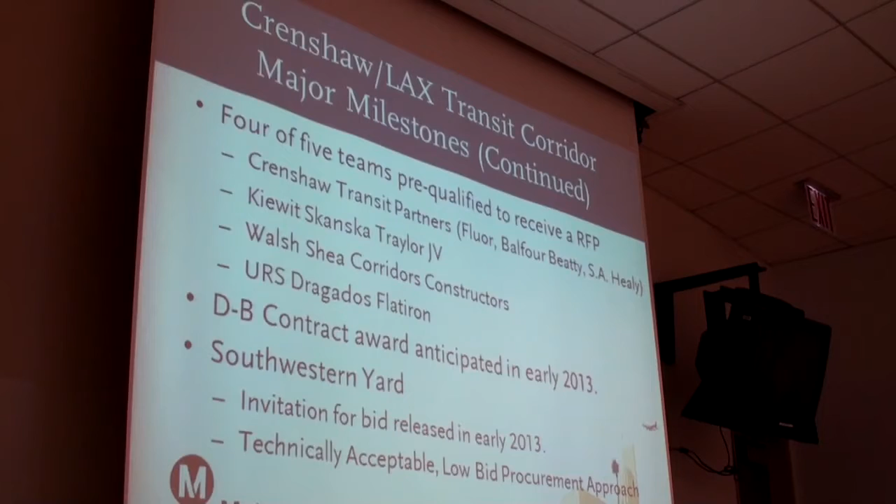Now we have another contract, again I mentioned earlier, called the Southwestern Yard. That's a fairly separate contract. It's actually going through the preliminary engineering design right now. It will be design build and released for bid in early 2013, either January or February. We are going with a low bid procurement approach on that. So we're not looking right now to go best value on that. We're looking to go low bid, design build on that yard.

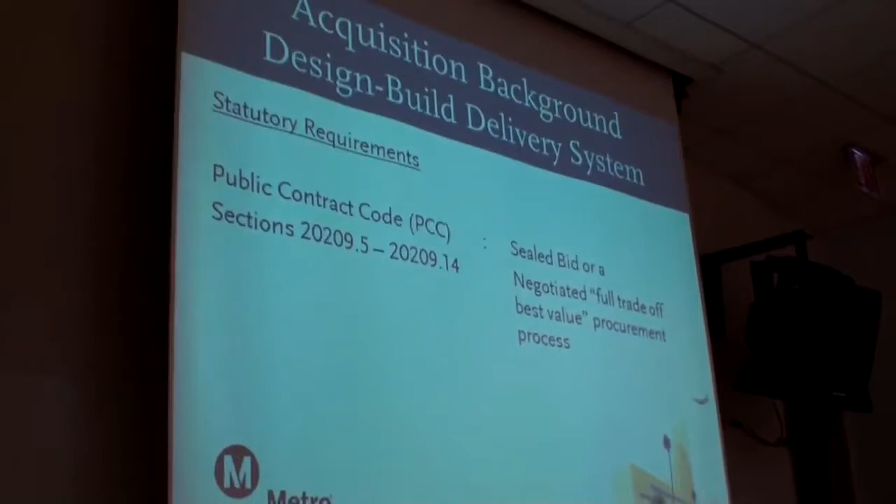Okay, just going to take a sip of water. What am I doing for time? We doing okay, Mark? You're good. We will give them 5 minutes for questions and they'll be happy. But if everybody lets him finish, then we can get to the question and answers. Okay, I don't have to. Please. I'm almost done. All right, good.

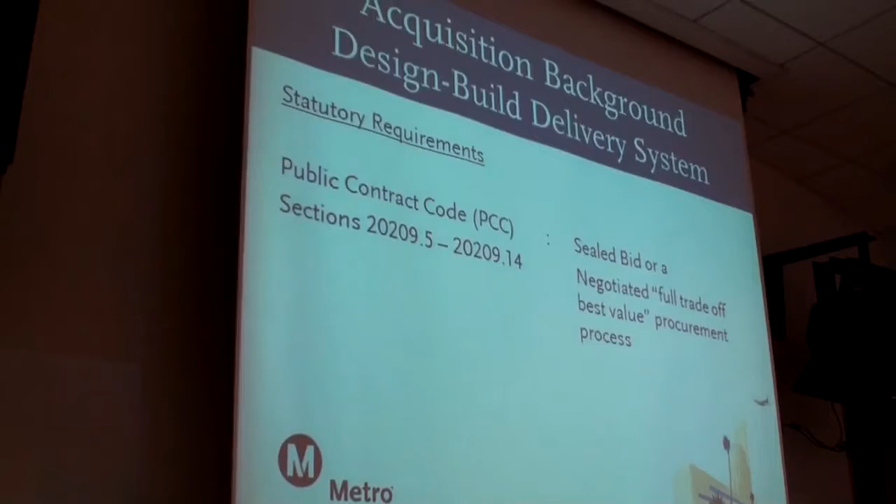Okay, so again, this is the public contract code that we have to follow. That's either a sealed bid or negotiated full trade off best value. Again, for this big contract, we are going best value procurement. So again, step one, we have adopted a two-step process. Step one is an RFQ that went out last December. It was based on a fairly detailed questionnaire. It was all pass-fail.

Step two is the RFP we just released. We will be expecting both a technical and price proposal evaluation, and we'll make a best value determination.

Major activities in the RFP phase: we'll review initial proposals, what I call the ATCs. For an ATC, alternative technical concept, we're looking for innovation. It has to provide value to Metro and could give the contractor a competitive edge. We don't want any innovative ideas that would require us to reopen the environmental document. That would be a no-no.

If we do not make an award in phase two, we'll go into phase three. We will establish a competitive range and request what's called a best and final offer. At this stage, we're actually sitting down with the contractors and negotiating. We'll ask for a BAFO and determine a contract award.

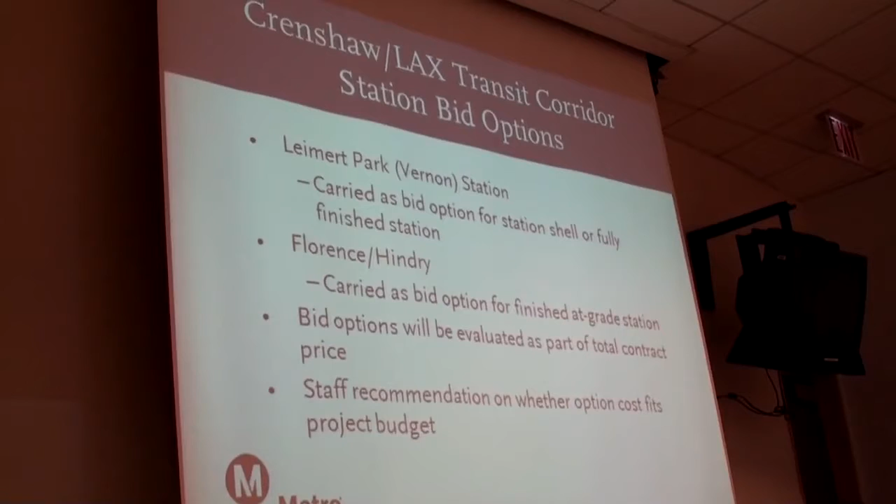I think I'm almost done. Bid options, Leimert Park. The board last year directed staff to design a bid option for the Leimert Park station, and we did it both ways: as just a station shell to be built out in the future, meaning we don't preclude an underground station. Understand, though, that if we don't build the station now, it's very difficult to build it later once you're in operation. So there are two options, a shell or a fully finished station.

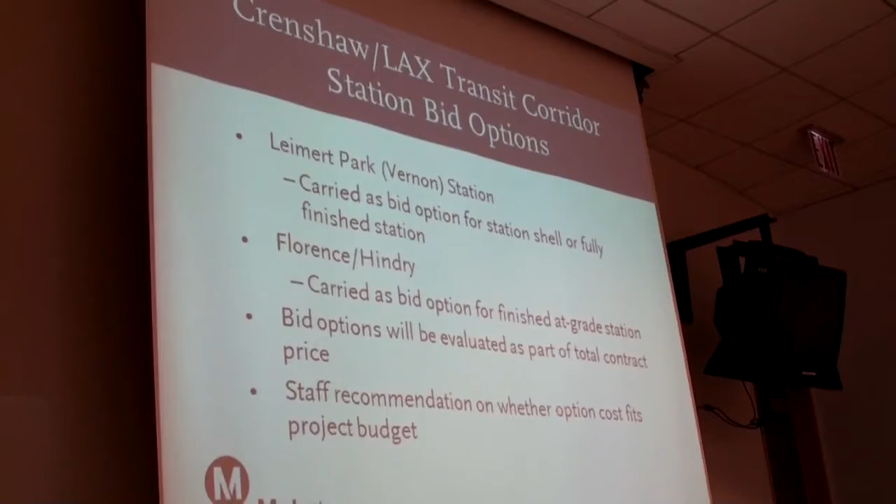Also at Florence/Hindry, it's carried as a bid option for a finished at-grade station. Bid options will be evaluated as part of the total contract price, with a staff recommendation on whether the option fits the project budget.

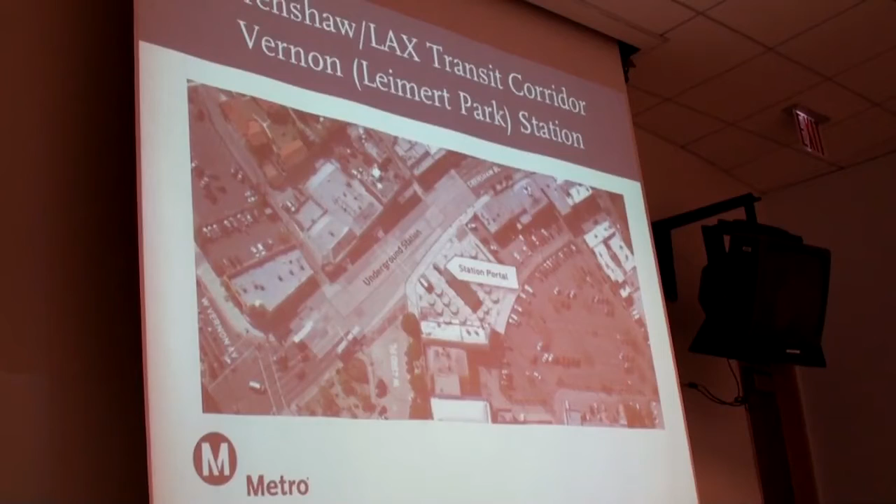I'm down to questions. Okay, let's start with questions. Does anybody have the first question?

I have six, but I will... Hang on, I'm going to call on you by raising your hand. You get one question per person until we go around the room until everybody's satisfied. We'll start with Russ in the back.

You talked about optional stations. How much is it to put in an underground station versus a shell?

Well, I don't know, we should probably ask the contractors in the room that question, because they're going to be proposing to us. Just sort of a ballpark, what would you guesstimate? Two-thirds of the cost of an underground station, perhaps. I really don't want to put out any ranges, because I know I have some of our teams in the room that are actually going to be bidding on this. You say two-thirds? I mean, all your...

I'm not a contractor. You're still building the shell, and you're not finishing it. You're not putting your equipment in, you're not putting elevators and escalators in, but you're making the provision for all that build-up. So there's a trade-off there.